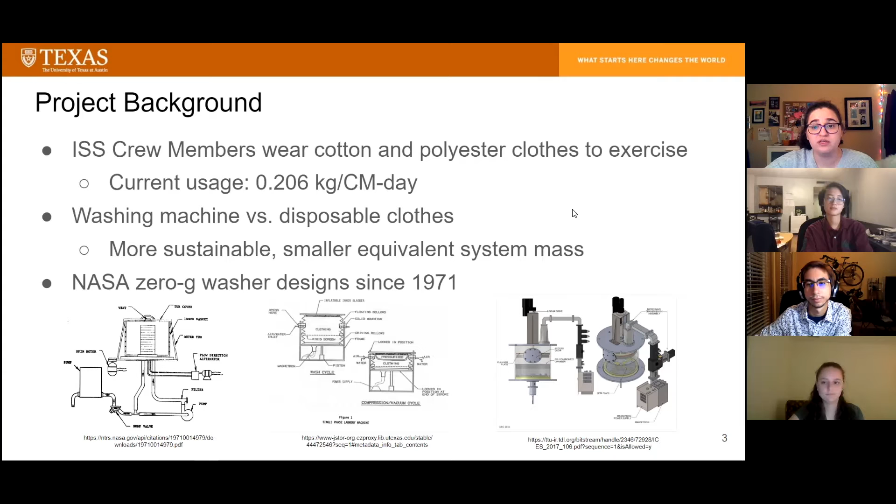Given our project background, we developed the problem statement listed here to summarize the mission of our project. TSGC also provided us with a short list of design goals for the machine. For one load, the washing machine needs to be able to clean up to 3 kilograms of clothing, use less than 30 kilograms of water, consume less than 750 watts of power, and have a total mass less than 60 kilograms.

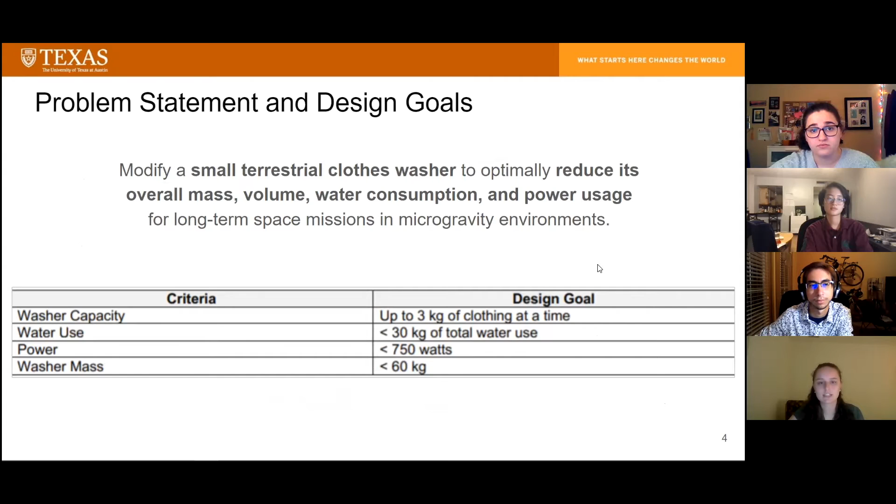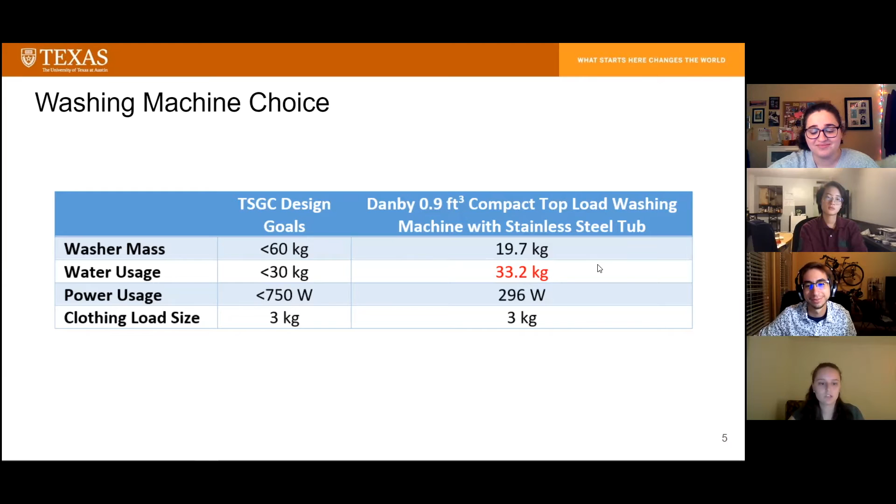So the best way to meet the goals was to start with a machine that already came close to our desired results. We researched several different types of compact washers and selected the machine that best matched our needs and we were able to obtain in a reasonable time frame. As you can see from this table, the machine initially met the target washer mass, power usage, and load size. However, the water usage was slightly higher than our target value. In modification and optimization processes, we strive to reduce the water usage and keep the washer mass and power usage below these thresholds.

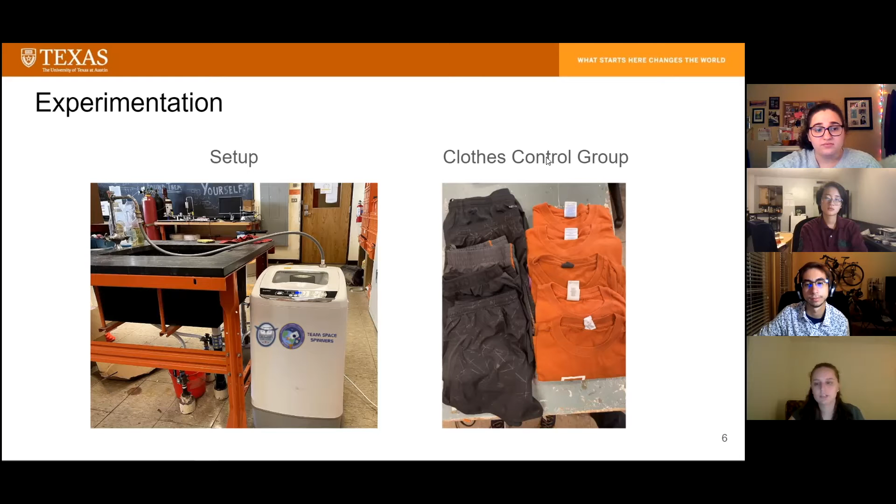Once the machine arrived, we were able to begin experimentation to confirm the provided machine properties and to test different optimization methods. In order to run multiple comparable experiments, we used very similar sets of one cotton t-shirt and one pair of polyester Dri-Fit shorts as our control load. The first set of experiments we conducted at the suggestion of our project mentor was focused on removing as much water as possible from the wet clothes after washing. Doing so would reduce the amount of time and energy required of our sister team working on a terrestrial-based clothes dryer for similar applications to our project.

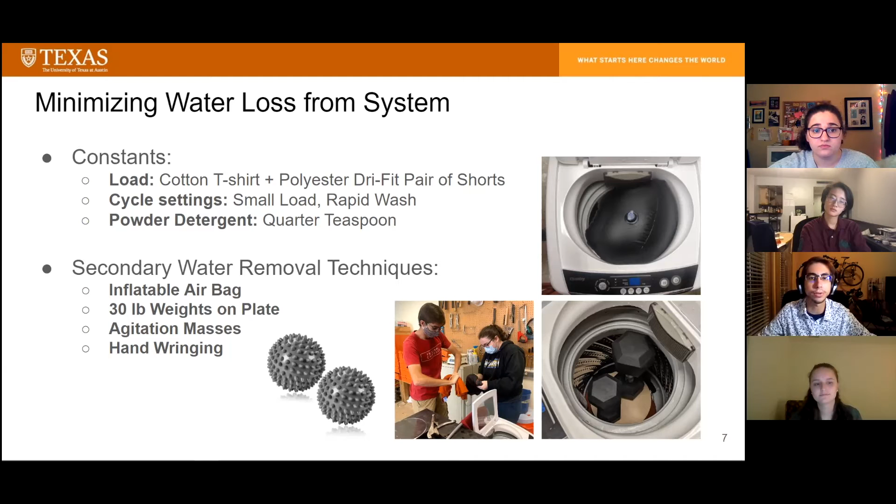To do this, our group first brainstormed a few ideas for mechanically removing water from the clothes. These ideas included inflating an airbag within the washing chamber to press the clothes against the side of the drum, pressing the clothes against the bottom of the drum using a plate and weights to simulate a linear actuator, and adding masses into the drum to agitate the clothes during the spin cycle. Although not especially feasible because of the added time it would demand of the astronauts, as well as the risk of flinging water that it would introduce, our group also tried wringing the clothes by hand to create an additional point of reference.

In each experiment, the weight of the clothes was measured before the wash, before the spin cycle, after the spin cycle, and after the secondary drying mechanism. Each configuration was tested twice to generate a more complete data set, and throughout the experiments, the peak power draw, total energy usage, and water consumption were also cataloged. The results of the experiments showed a consistent pattern wherein the clothes absorbed about 3 times their dry weight in water before the spin cycle, and this spin cycle then removed water until the clothes were 1.6 times their dry weight. None of our secondary mechanisms proved noteworthy.

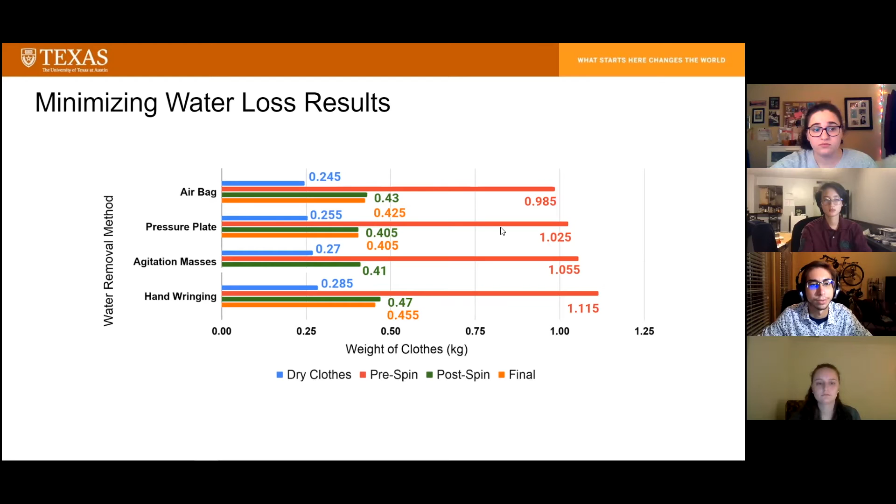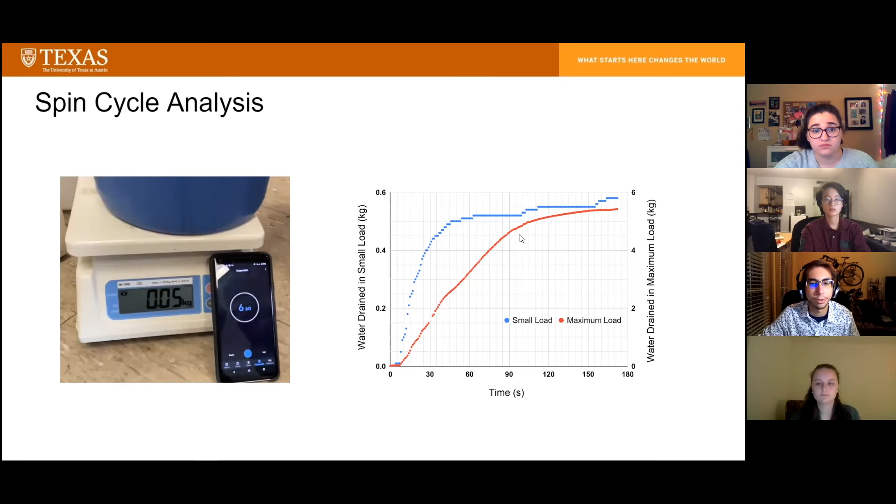The effectiveness of the spin cycle prompted us to investigate it more closely. By setting up a bucket and recording the mass of water extracted during the spin cycle against time, our group was able to arrive at some meaningful conclusions. In 2 different experiments, one run with the same clothing set as the previous experiments, and the other with the washer filled to its capacity with 3 kilograms of cotton t-shirts, the trend between water removed and time was initially linear before falling off at an asymptote just under twice the dry mass of the clothes. It was also observed in both experiments that 90% of this asymptotic value was achieved within 100 seconds and 95% within 2 minutes. From this, we could determine that spinning for longer periods of time would have severely diminishing returns.

To minimize the power consumption of the washer, we measured the peak power draw and energy consumption of our control load of clothes using a power meter. We ran several tests with customizable washing parameters, mainly focusing on the 5 different wash modes: heavy, gentle, soak, normal, and rapid. We applied peanut butter to dirty the clothes, and this helped demonstrate to us that some of the washing cycles were ineffective on their lowest settings, such as gentle and heavy, since they left heavy peanut butter smells and stains.

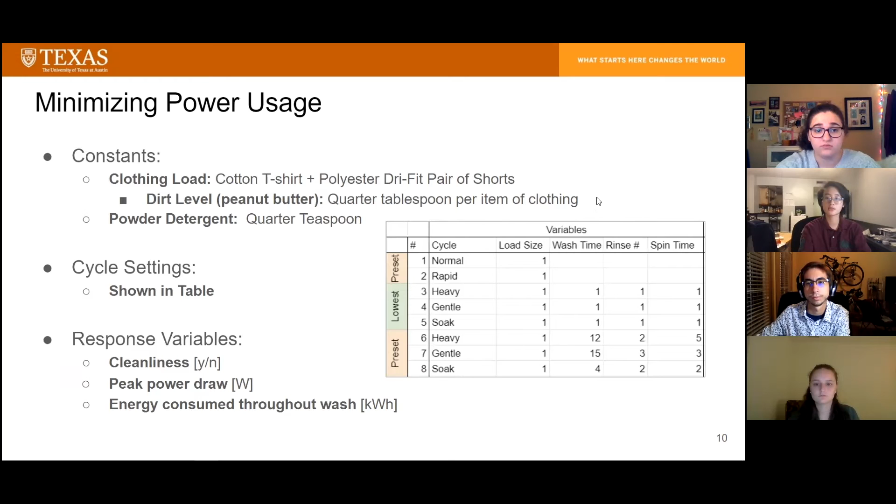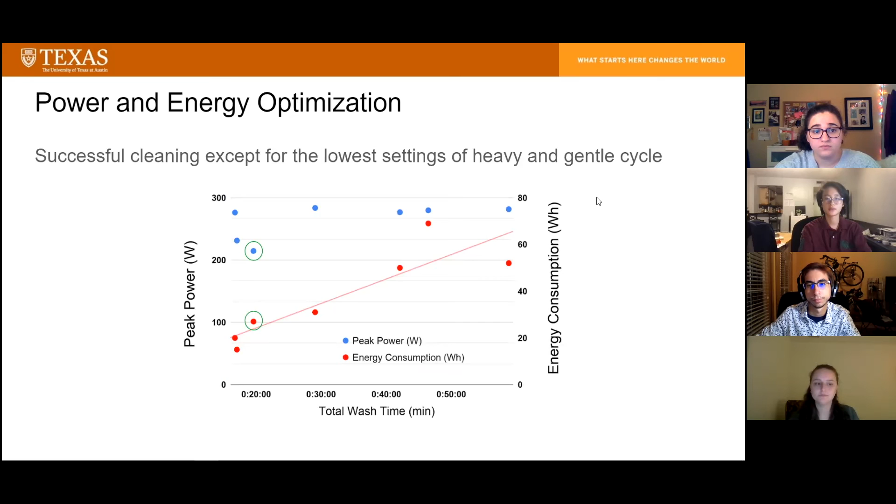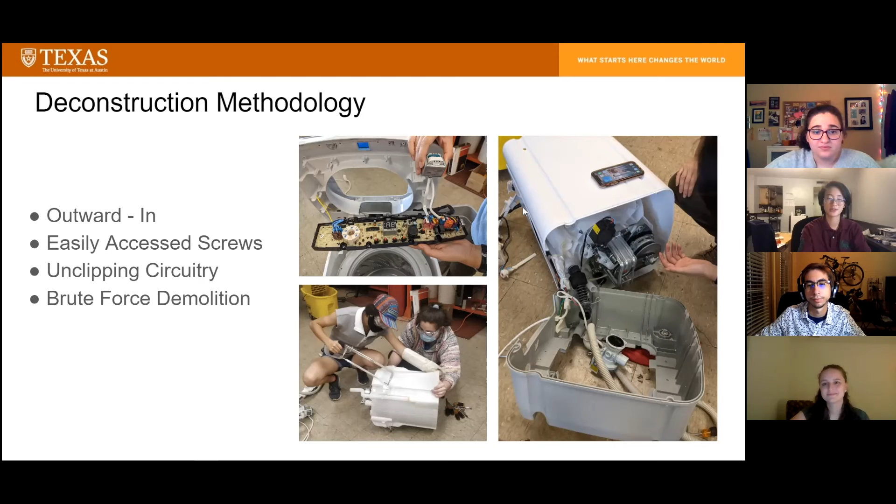Throughout the process of disassembling the entire washing machine, we were also categorizing the pieces by weight, material, and additional comments, such as electrical specs or part interaction. A large majority of the plastic parts are injection molded, and most of the metal components are bent stainless steel. These materials make sense due to their interaction with water and ease in mass manufacturing.

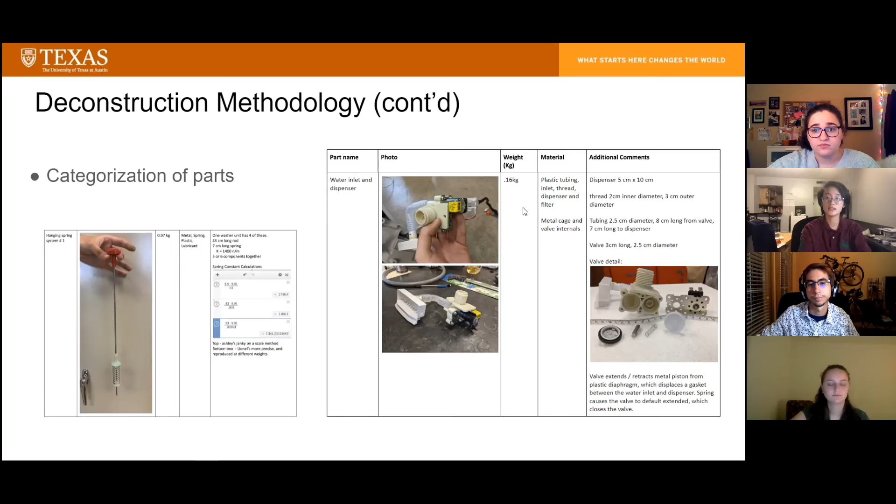From the categorization of parts of the washing machine, we came to the conclusion that there are some areas of optimization. One of our first changes would be to replace the current plastic and metal construction with lighter materials, such as structurally placed carbon fiber or titanium. This, with a modification to the tub size, would help us conserve energy in the system by reducing the moment of inertia. We also believe that some components can be replaced with higher quality and lighter substitutes, such as the main motor.

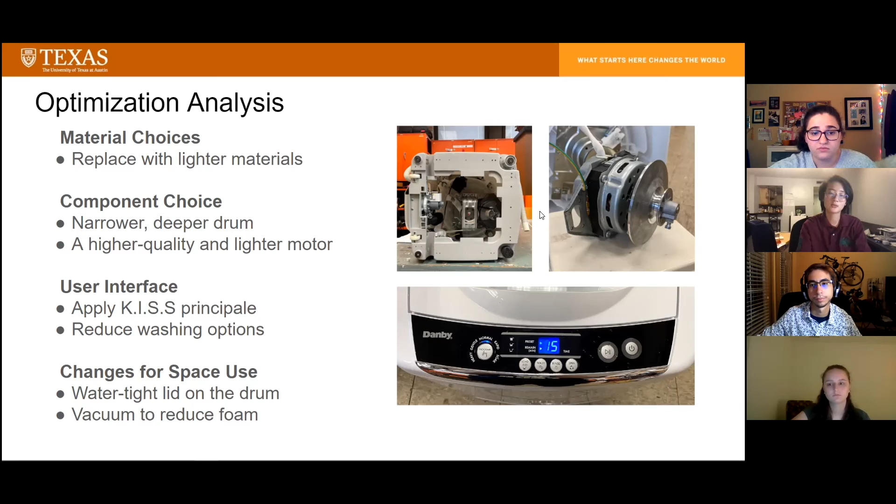For the user interface, the team recommends reducing the cycle choice to just one, since it will decrease the amount of time crew members spend with the machine. In addition, modifying the washer for space use, we would first recommend creating a watertight seal for the lid so that water cannot leave the system. And second, we would recommend connecting a vacuum system to help reduce foam generation.

Through our design, experimentation, and analysis processes, our team selected a compact washing machine that had promising specifications of a low mass, volume, and power draw, which would meet our design goals. We were able to confirm each of these metrics through the measurement and experimentation with the machine, and later through the optimization. We began calculating how much we could lower each metric.

Steps and modifications can be made, such as the rinse water being held and reused for later washes, and this solution has been seen in previous NASA washer projects. These modifications, in combination with the lower specs of the compact washer, would meet all the requirements and would be a feasible design for microgravity use.

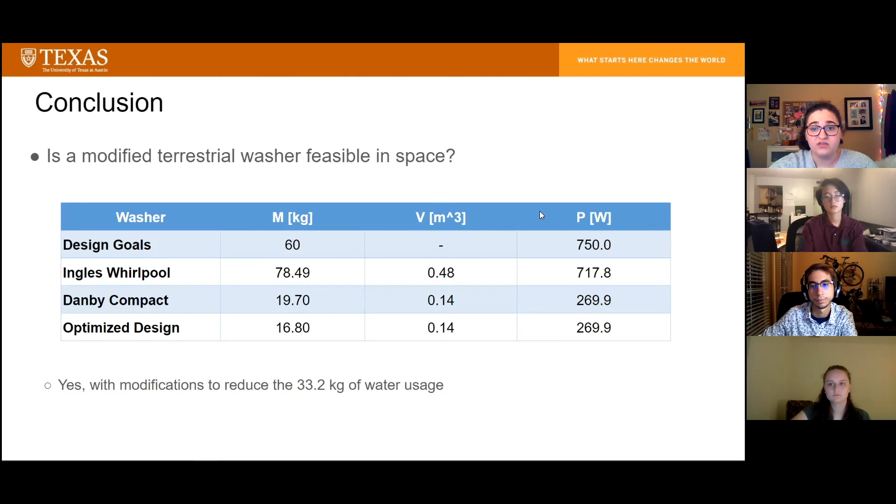Following these last 2 steps, we will be set to complete the equivalent system mass calculations, assumptions, and comparisons for the trade-off analysis. Hopefully, this will show that the optimized washer is the best option for microgravity applications, and that these modifications should be implemented and tested.

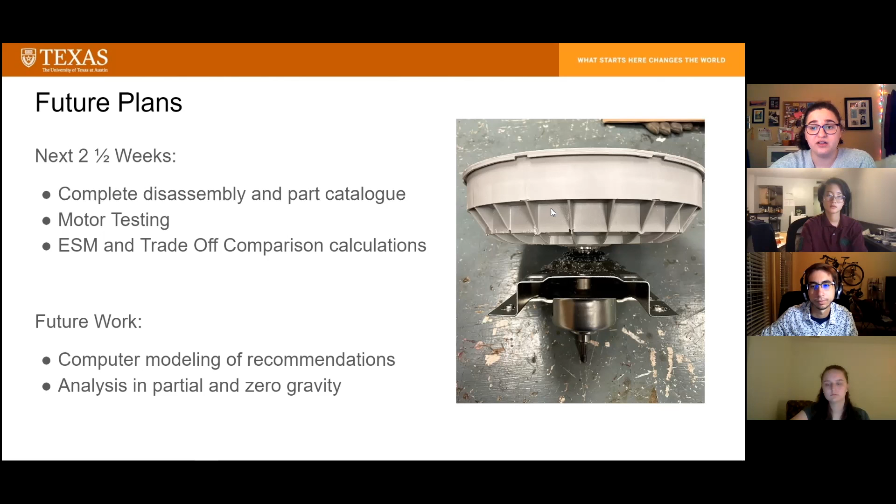Lastly, before the Q&A, future steps to continue this project would include computer-aided analysis to provide the maximum mass and volume optimizations, and to combine those results with low-gravity simulations or tests to prove that this concept would work in practice. Thank you very much for listening, and we look forward to answering all of your questions today.